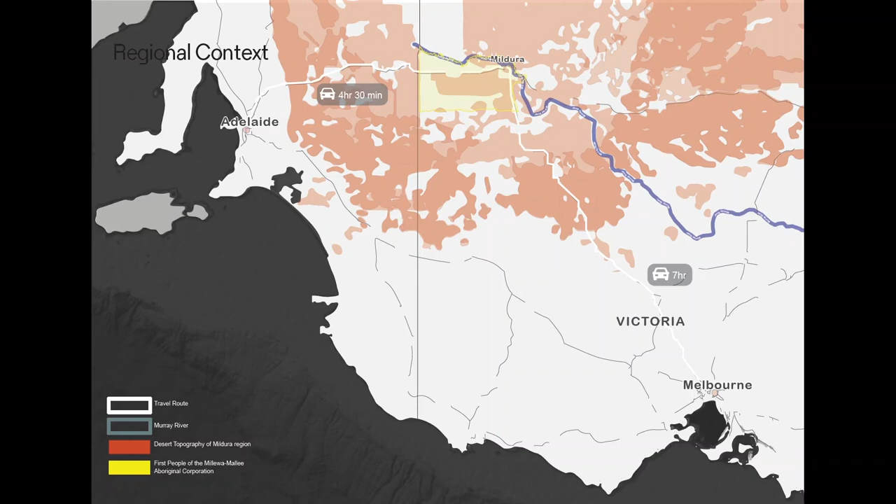We are on the Millewa-Mallee, on the country of the first people of the Millewa-Mallee, and 7 hours by car, so it's both physical separation—and we specify local materials and suppliers extensively—but it's also very much a psychological separation. Mildurans have a really keen sense of standing alone on their own two feet, and the community and council...

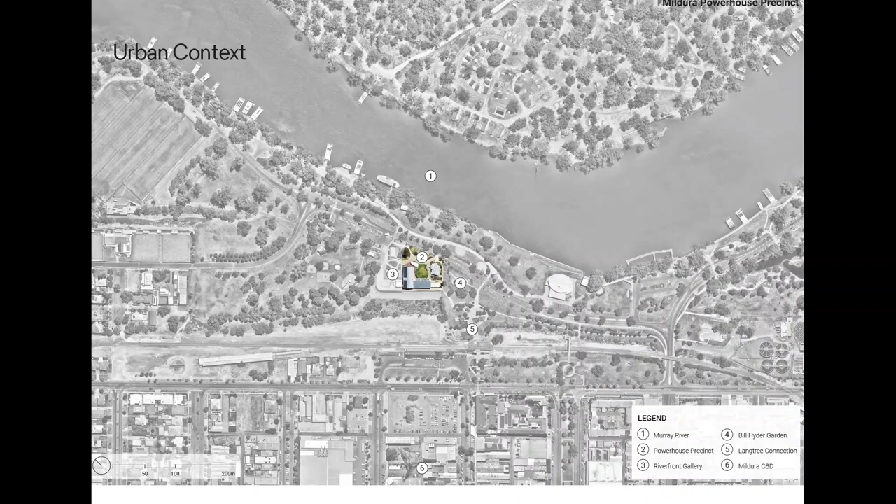So a full two-level change down to the water's edge. This project is about activating the riverfront. It's the catalyst for future regeneration of the whole riverfront, but it was also very much about connecting the CBD and the community back to the river.

The powerhouse itself was part of a broader settler industrial complex that brought electrification to Mildura, and irreparably changed the river wetlands. As a result, you can kind of see our powerhouse building here—one of the original images, the interior, and the site that we inherited.

To the first people of the Millewa-Mallee, this site is culturally sterile, probably understandably, and the broader community really have a bit of a somewhat conflicting real pride in the technological innovation of their forebears, and a desire to see Indigenous culture centred in this place.

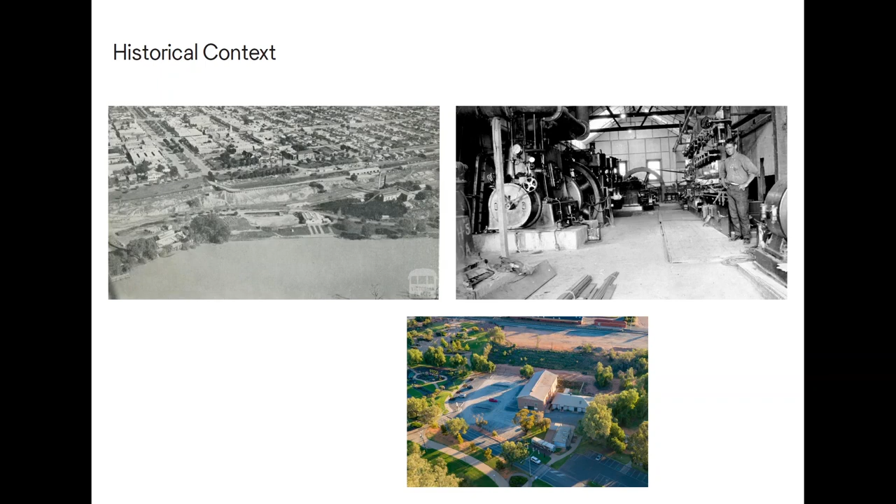The first people were clear that this project was not a priority for their community, but they wanted its programming to respond to their needs, which I think it does.

But from our earliest appointment, which was really at the height of COVID—so I guess intensifying that sense of regional and urban distance—the community were very clear that they rejected this recently endorsed master plan as being an overdevelopment of the riverfront. So they were very clear that they wanted less built form, yet we still had to...

Activate the precinct 24/7. They were also really clear that despite all of the funding coming to drive tourism from all three tiers of government, it had to benefit locals. So there was this real shift to local businesses, local social enterprises.

And what that means operationally is that we had to have much smaller spaces that were far more flexible and lower cost, lower entry for community groups to engage with. At the same time, we had to not hand council a financial burden to operate this as a small rural city council.

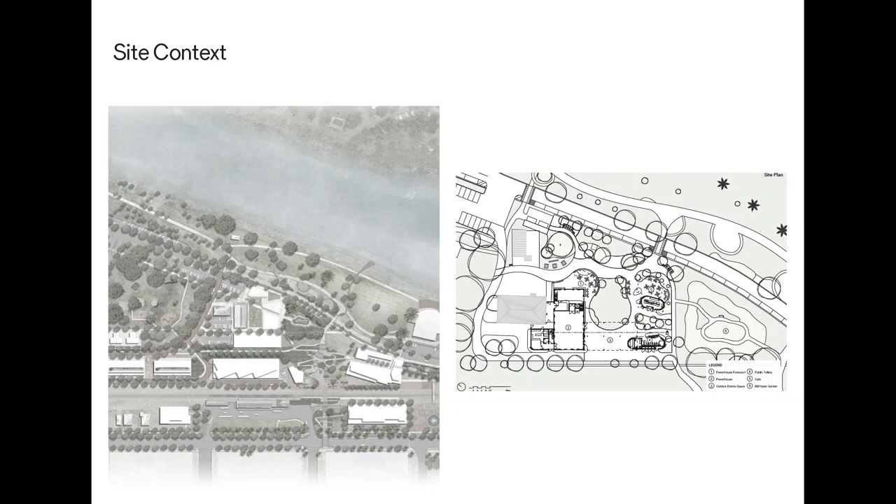So we were supposed to be ripping on with design. This was shovel ready from that master plan, but in fact our project had a bit of an identity crisis.

So with council, we really broadened out what this precinct could do and who it could serve. They bravely put a placemaker on rather than a council officer to curate the precinct for the next 12 months, and they committed to, I think, a pretty bold vision for a much lo-fi, kind of distributed precinct.

So we went from this kind of singular, spectacular object, which necessitates a degree of institutionalisation, I think, to these kind of shifting territories for tribes. So the people program the powerhouse, the people really live in the powerhouse, and tourists who come to see the powerhouse—but really it's the people who are interacting in the space.

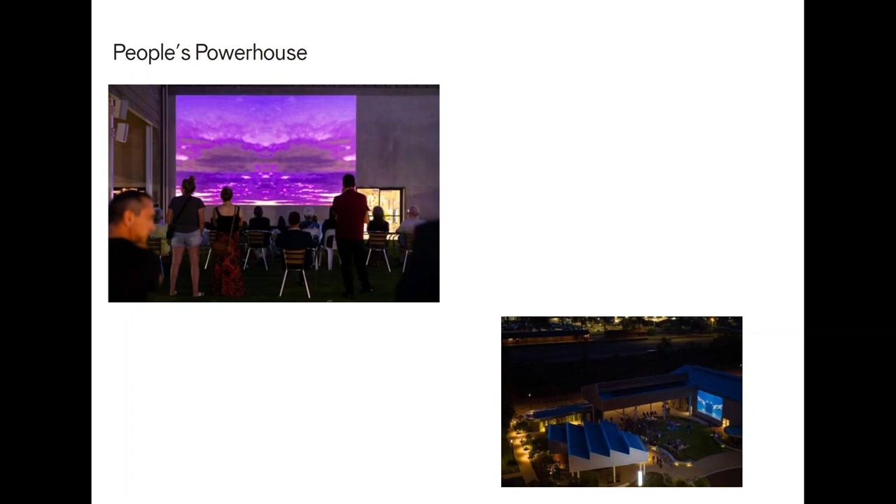And so our design really centred on three key ideas that operated at a whole bunch of scales, so the precinct scale right down to the kind of interiors.

The first is this idea of shifting from an industrial to a kind of sensorial approach. So the powerhouse itself has a scale and a presence and thermal performance, of course, of an industrial building.

And we've reinstated it as a kind of ghost of its former self. It really anchors the powerhouse and gives it a sense of scale. And those two vast roofs then gave us an opportunity to turn this extractive complex into one that was more restorative. So vast solar arrays and batteries on site means that this powerhouse of electrification is now doing it renewably.

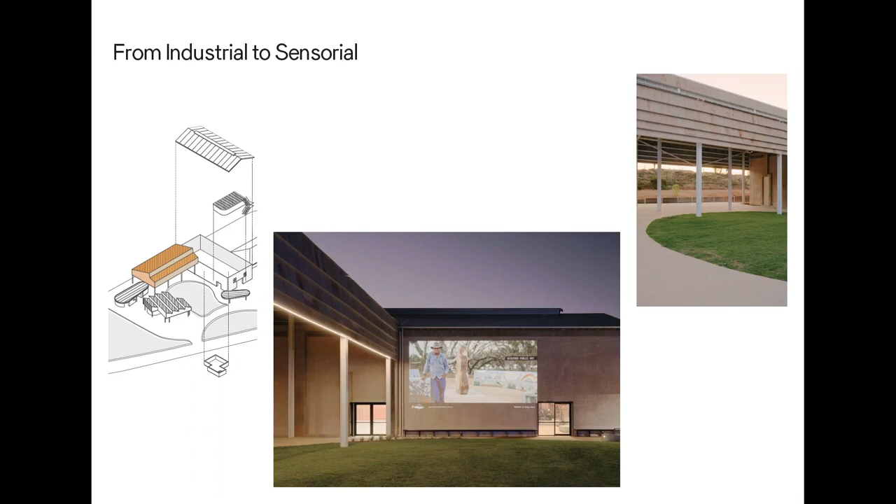And around these two mammoth structures, we disaggregated the program into a series of smaller built forms, which is really driven around being as human-centred and textural as possible, with lots of consideration around inclusiveness. The social enterprise that operates on this site works with intellectually and physically disabled people.

So travel distances to toilets, incredible accessibility, changing places on site, but also just respect. This is a catalyst for a riverfront that otherwise has a lot of vandalism, rough sleeping, so making sure that there was a kind of transparency and passive surveillance.

These three buildings are all made out of hempcrete. They're the first public hemp masonry buildings in Australia, the result of years of R&D for our practice, and I guess really trying to find a new architectural language that suits this new material, an ancient material being newly discovered.

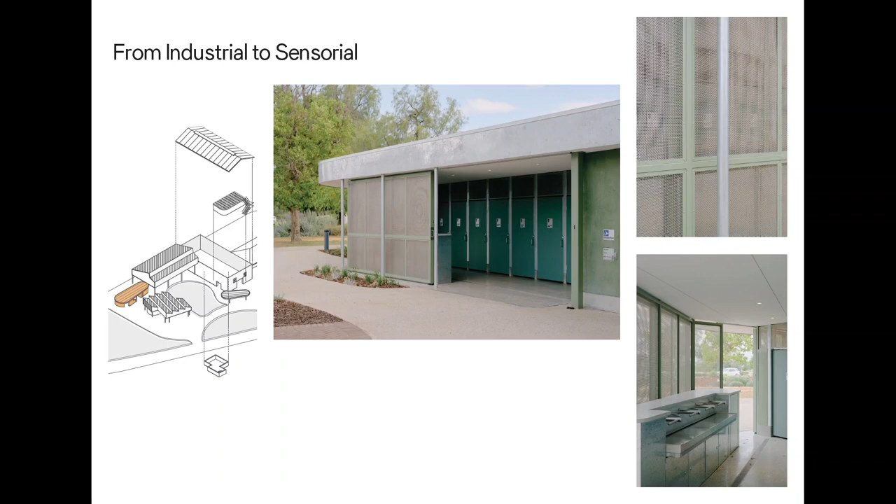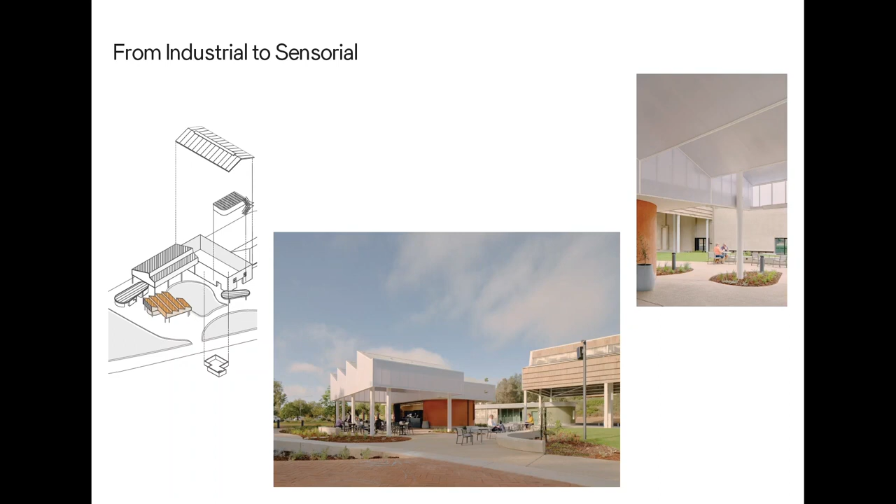Which looks like this. Externally, it's really this play of mass, skeleton and skin. So rusted skins that are reclaimed from site, luminous skins and transparent skins. Both internally and externally, on an extremely lean budget, we've had a nod to the industrial, but also introduced a kind of textural density to reward the senses.

The next big idea is a shift from formal to informal. So the master plan set out a village frame that had quite a rectilinear formality to it. That Eurocentric notion, terminology and typology, was dismissed early on in consultation with the broader community and the Aboriginal community.

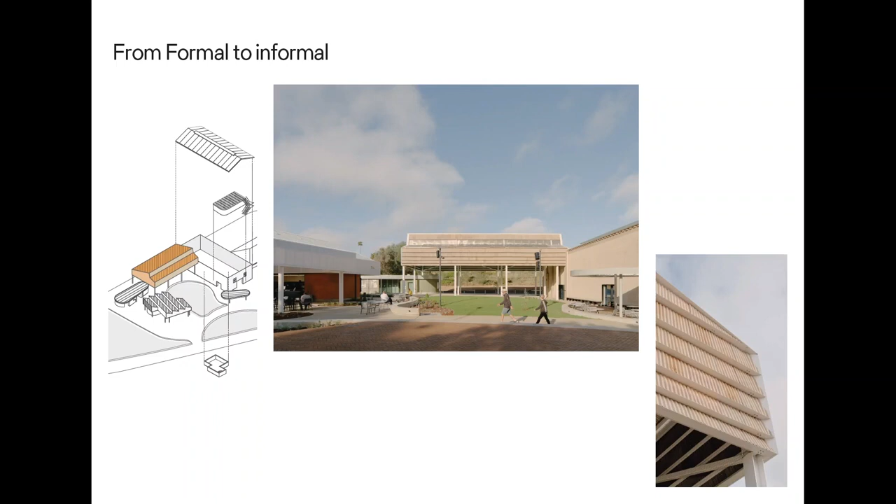And there was really an attempt to make sure that we had this sense of fluid slippage across the site. It's pragmatic in that there's no front, there's no primary arrival point. This place needs to change according to community demand and development in the next 50 years.

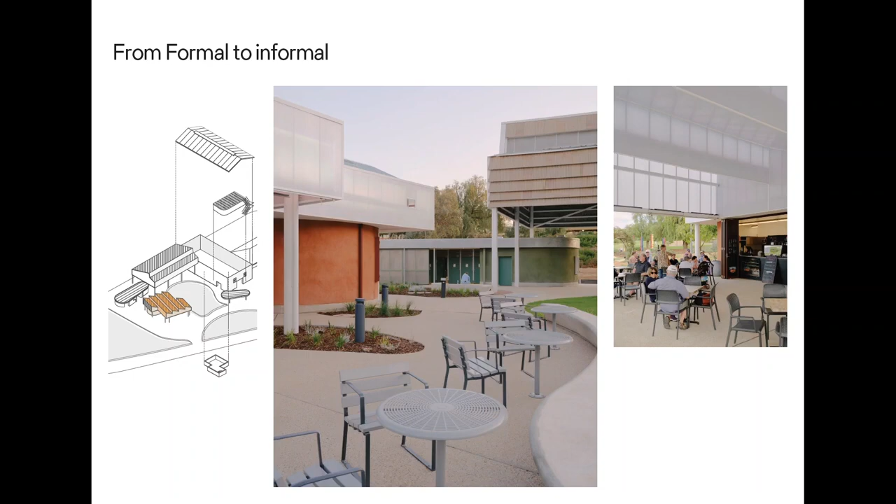So we've used the least built form possible to try to demarcate zones across this site. I'll go really quickly now.

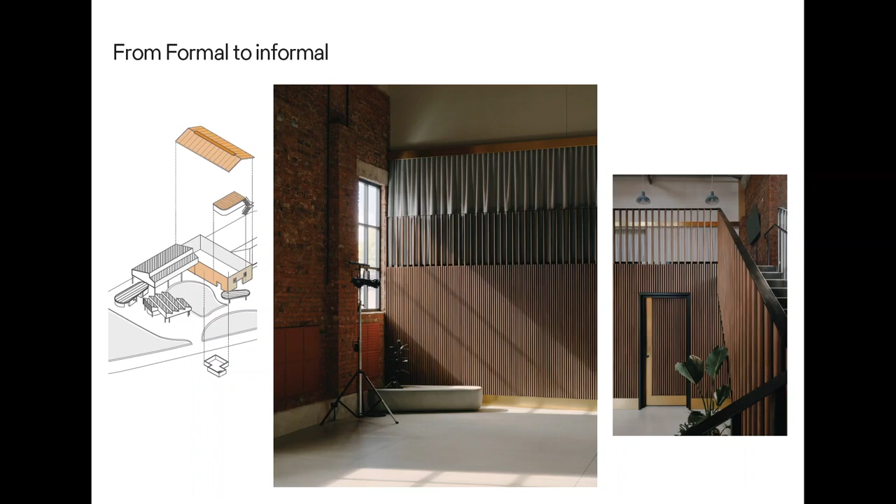Internally too, there's a flexibility and a permeability. So this is the powerhouse closed down with each of its discrete spaces functioning separately, but through operable walls and all those curtains they can connect.

The last idea really is about the precinct needing to work from above. So this is the escarpment, the approach from the city. From at grade, of course, the low grade from the riverfront, and you can just see in the distance the bridge to New South Wales. So it has to work up close and at a great distance.

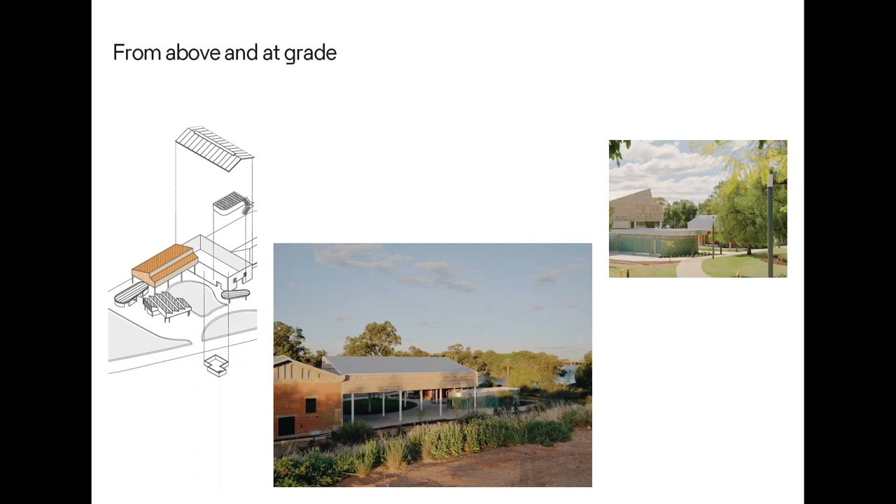So this really drove this idea of a roofscape, which we talked to the local community about, and then really got, because of the heat, as a language of hats. So different hats doing different kinds of things.

The boiler house is vast and scaly. It wears the rusted roof sheet of the powerhouse building, repurposed. The toilet building has a little cap so that there's open sky that marks it as one of the key entry points as you descend from the city.

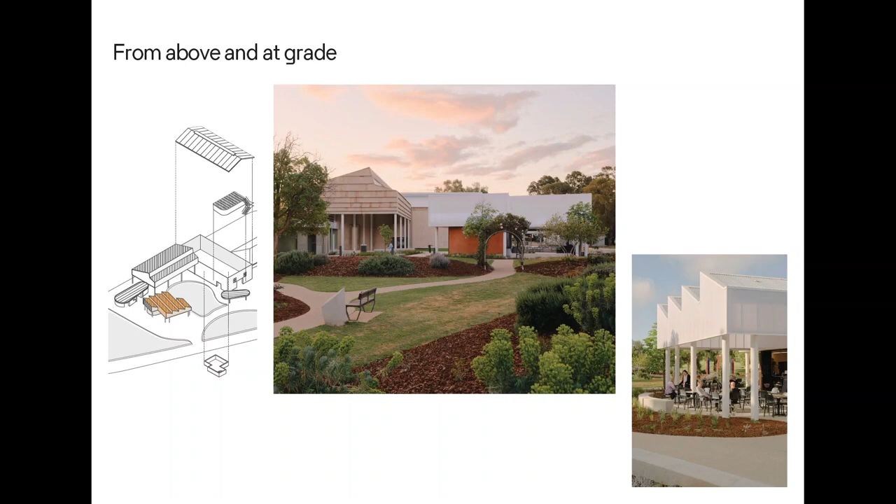And the cafe has a dramatic sawtooth roof that kind of holds a much greater territory for a small building, and acts as a beacon when backlit at night to say something is happening here, come and see.

Okay, and really briefly, what is happening here we think is, and our council agrees, is the community interacting with and seeing each other and regaining a sense of self through this place. So it's much less about the consumption of community on show, which I guess was the original pitch to government.

And at the opening, the Mayor declared that Mildura finally had its Fed Square, and so with great apologies to Don and Co, I think that really does demonstrate that this is...